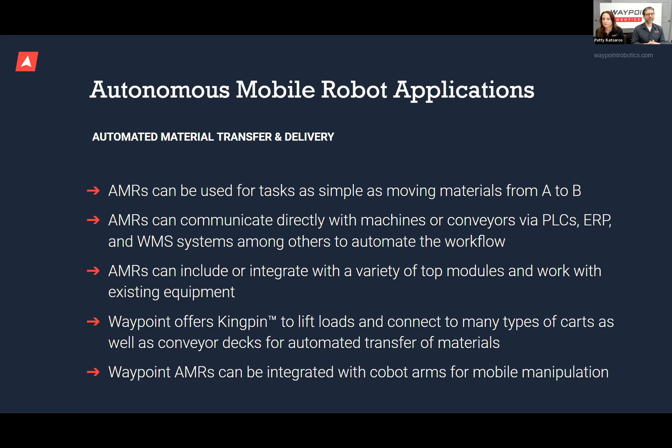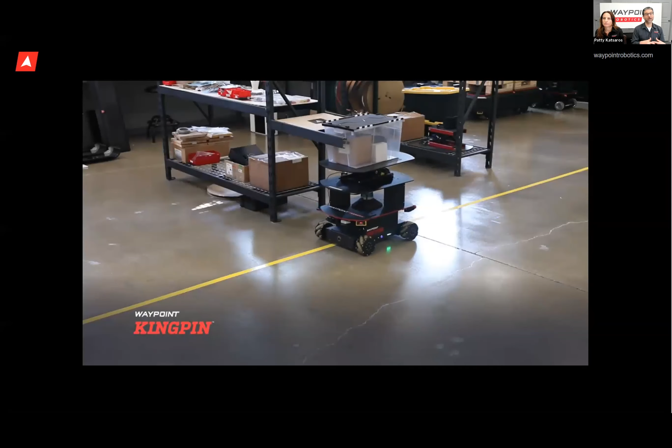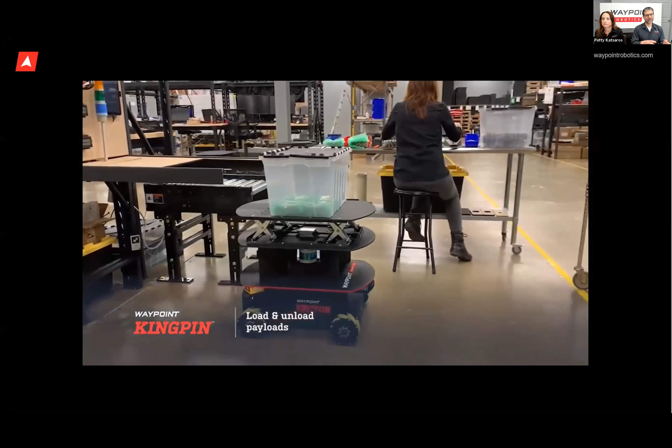This allows robots to automatically load and unload, which lets workers keep doing the things that only workers can do at each end, without having to synchronize their activities with the mobile robot. Having those activities decoupled at the beginning and end of the trip makes the people at each end more efficient and the robots more efficient, so they can each work in their own time. This is an example of the Kingpin top module.

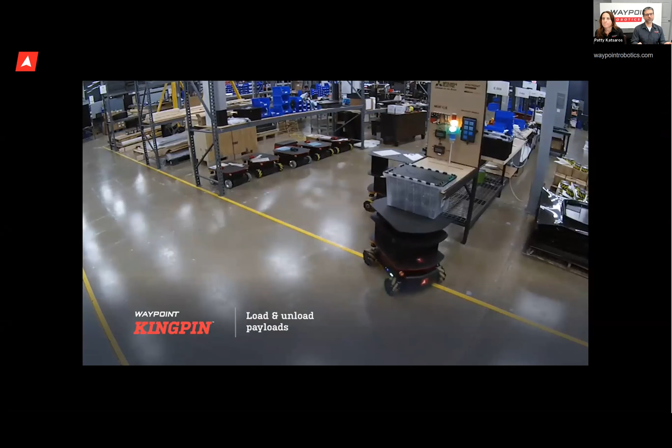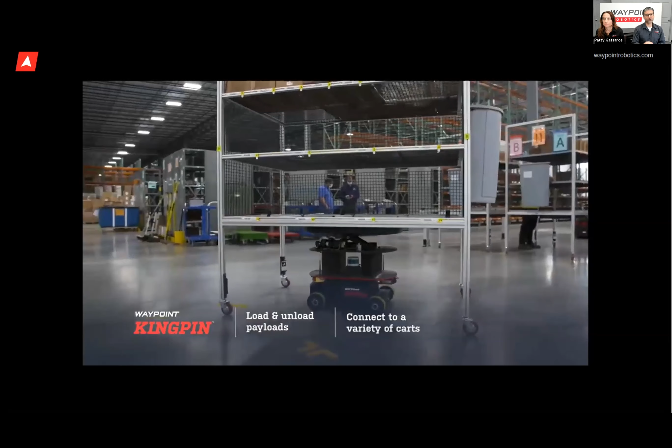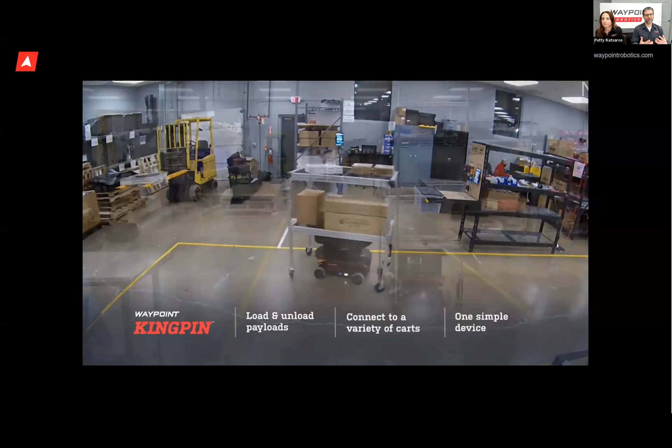It's a lift deck that can pick up and drop off totes. Another way to accomplish that decoupled activity is to use a cart, and Kingpin can also hitch to a cart and pull it around the facility. It can carry a tote one way and move a cart back going the other way. That decoupling of activities is one of the key benefits to having automatic loading and unloading.

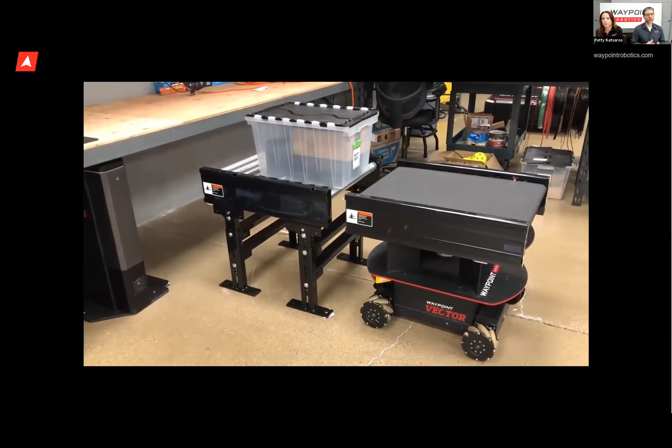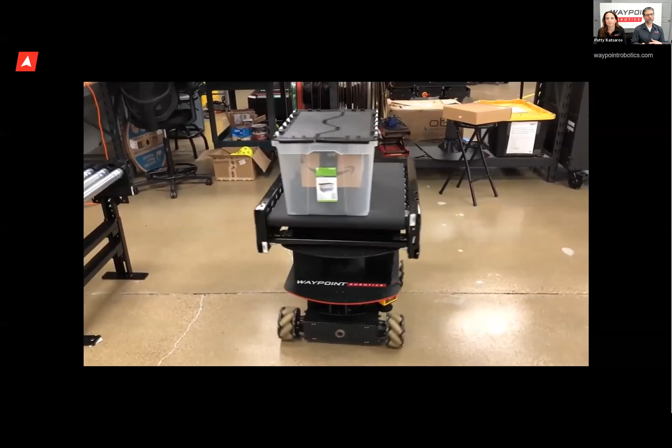There's other types of material. For example, a conveyor is a very common thing you'd find. The same value applies here: being able to quickly and accurately dock to a conveyor and then have it communicate with the fixed conveyor to exchange the tote, box, or whatever the material is. That decouples the activity of whatever is supplying the materials and whatever is receiving the materials, as well as all of the people working around it. So the objective is to take those dull, dirty, dangerous, boring tasks and let the robots do them.

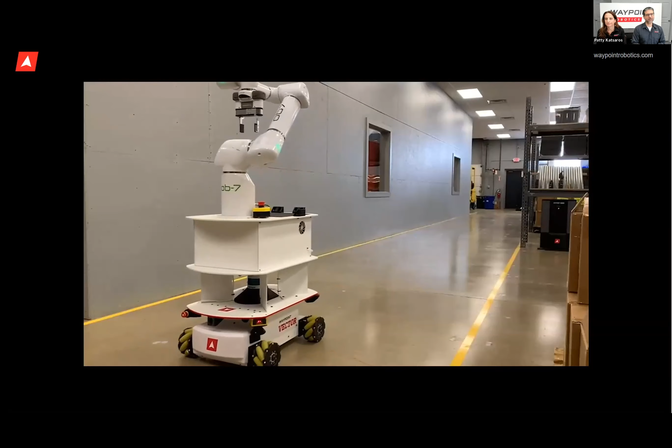The most sophisticated type of top module is a mobile manipulator. This is a collaborative robot arm combined with an autonomous mobile robot base. The best ones have a really complete integration of the two systems, and if they're really easy to set up, this is a robot that can move in spaces and move in ways that people are already moving.

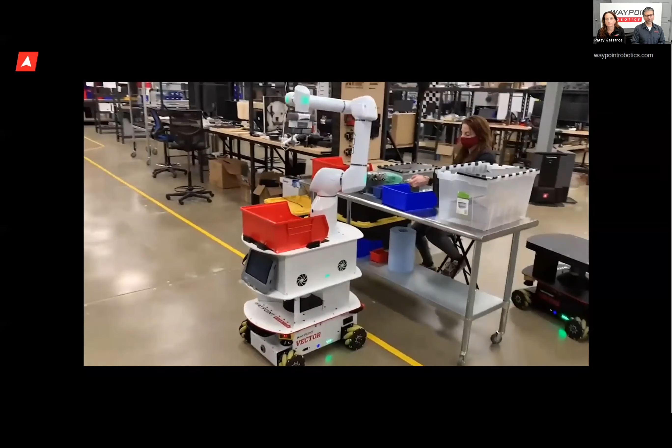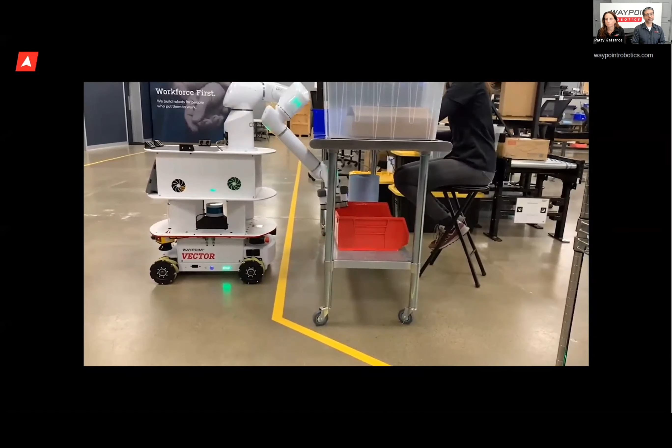So if you wanted to automate mail delivery in a huge facility, this is an example of a robot that doesn't need a pickup and drop off station or a conveyor or a cart. You can use all of the things you've already been using with a person and have the robot pick up a tote full of mail and drop it off at all of the appropriate stations without having to do anything additional to the environment.

Another application is heavy lift stuff and things that forklifts have traditionally been used for. We've had a lot of requests from customers over the years to try to reduce the safety risks associated with forklifts. It's kind of shocking how many injuries and deaths are related to forklifts, and it's not entirely surprising when the extremely long distances a forklift has to travel are the least interesting and most high-speed parts of the job.

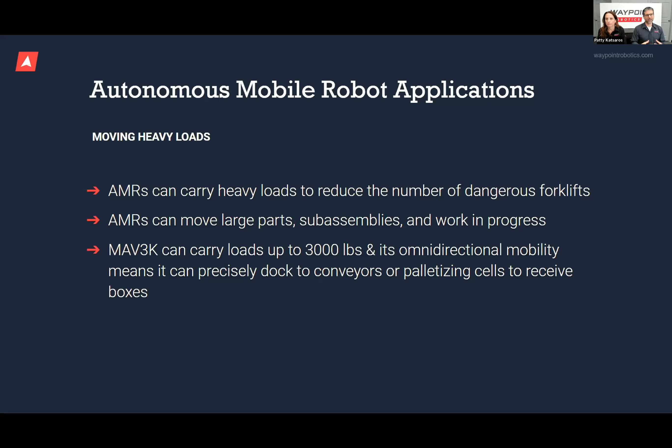If you can concentrate the activity of forklifts in a certain part of the facility and limit pedestrian traffic there, then again you're decoupling activities and separating people from the danger. You also have an autonomous mobile robot that doesn't blink, doesn't get bored, doesn't get distracted, and makes the long trip through the facility.

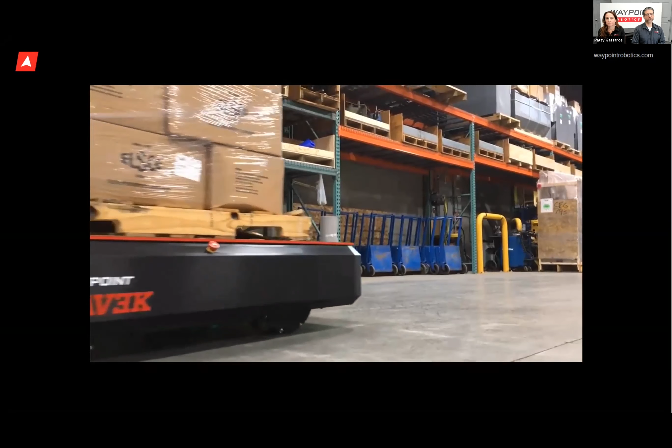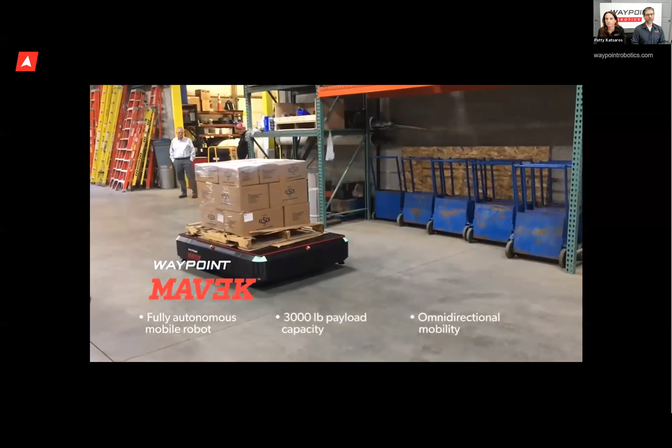Our customers are always talking about needing more people. Workforce challenges are really driving all of this, and forklift drivers are a great example of a skilled worker with valuable experience and expertise that are frankly hard to find and hard to retain when there's better offers. Being able to utilize the great team you already have for the things only they can do, and then let the MAV3K or any other heavy lift robot carry the big items through the facility, is a big win.

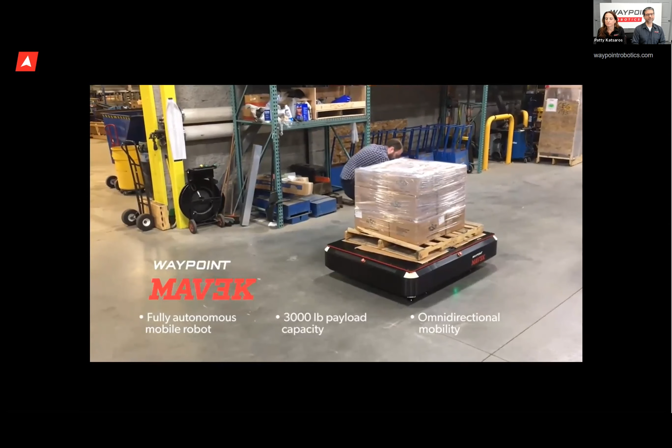And I'm going to steal Patty's joke: you also get a free pallet wrapper with every MAV3K you buy. So that's a good deal.

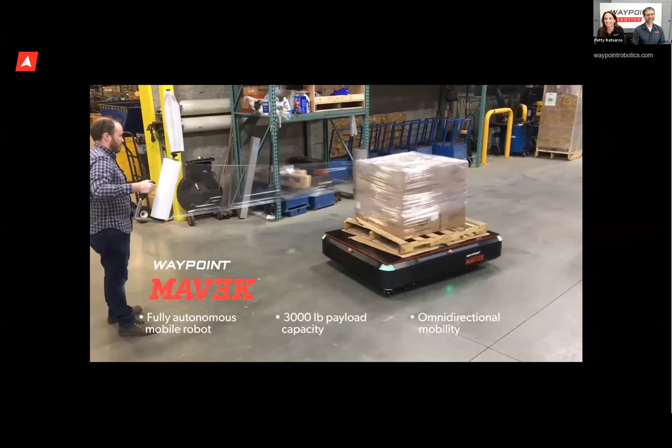This following video is a case study that we did with an e-commerce company. This company was already experiencing a lot of growth and needed to expand. They ship medical supplies to older folks in their homes, and when the pandemic hit, talk about an essential business. Their business was just booming, and we were already in the process of deploying an AMR fleet in their facility, which just really highlighted how necessary it was.

When they added the AMRs and the voice picking system to their facility, compared with their previous method of just using manual push carts, they were able to triple their picking efficiency and double the overall output of their facility with a 99.9% accuracy rate.

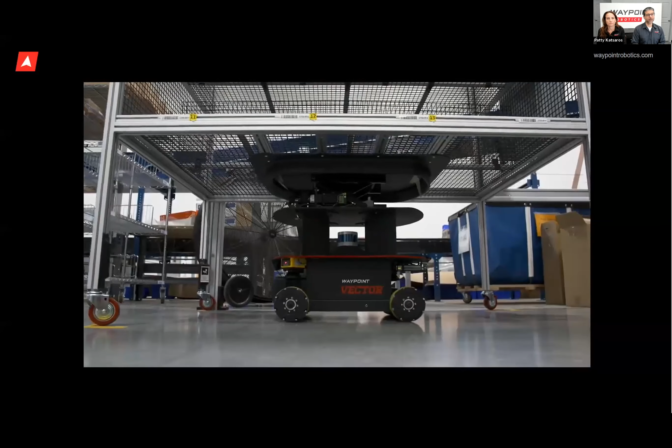They went from being barely able to keep up to actually getting themselves in a position where they're meeting all their promises to customers and meeting all of the demand, and also positioned so they can grow the company in a way they want to grow. This is an extremely scalable solution. The way it works is the voice picking system sends the robots and the people to the same destination independently.

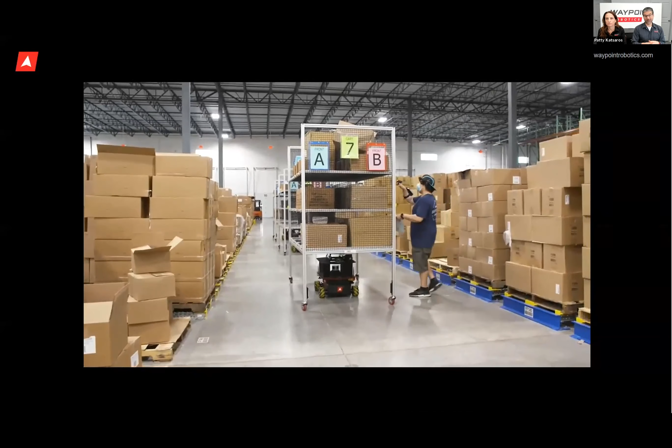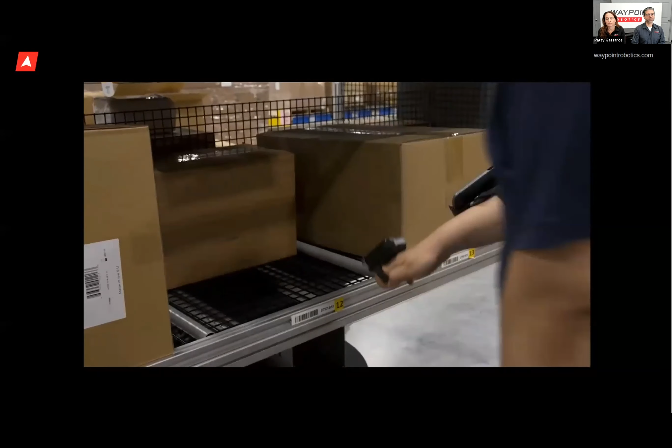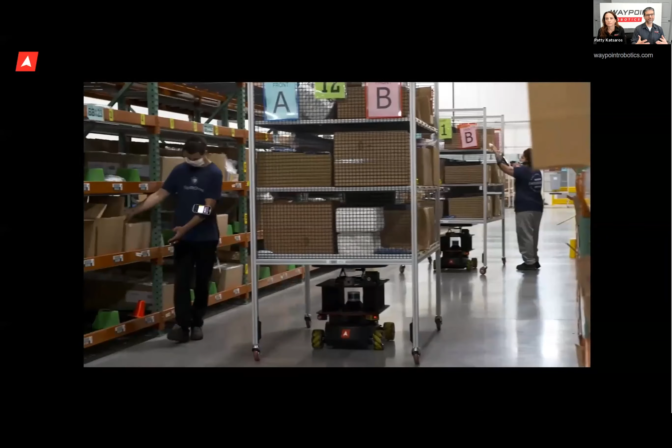And when they meet at that location, the picker gets an instruction to pick a certain box and place it in a certain location. And then when they scan that code, the robot goes on to its next destination, and the picking system sends the person to their next destination. This decoupling of material movement from the things humans are uniquely great at doing is one of the things that makes this such a powerful technology.

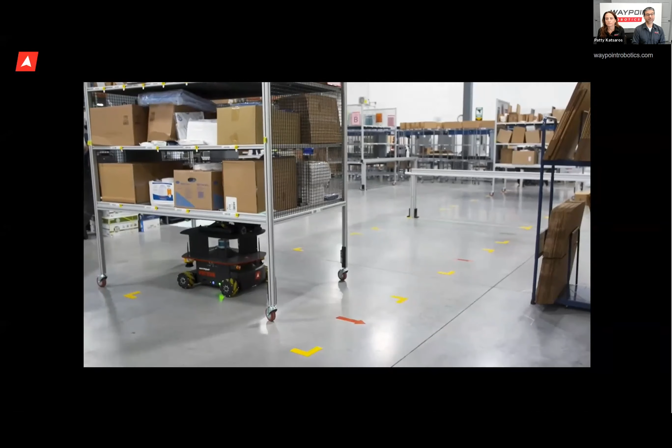Okay, so we talked a lot about the potential benefits that AMRs can offer workers, but a lot of companies are still reluctant to adopt, and workers are a bit hesitant. And we want to dive into this a little bit more.

So we hear all the time that workers push back when change is forced upon them, and like everybody, they often fear the unknown. When you have tools that are complicated and not really made for them or with them in mind, they might hesitate and be fearful of the tools.

We'll hear that they often resent these outside experts who come in and pretend they know the technology of the robot or the automation piece, but they don't know the company, the task, the job, the trade like those valuable workers do. Those workers who have such great expertise are going to resent those outside experts.

And then they're going to naturally worry about job security. If a complicated tool comes in, they might immediately think we could get displaced, especially lower skilled workers. Data even shows that can happen. So if it's a complicated tool that's difficult to work with, they understandably are going to resist and be fearful of change. So what can be done?

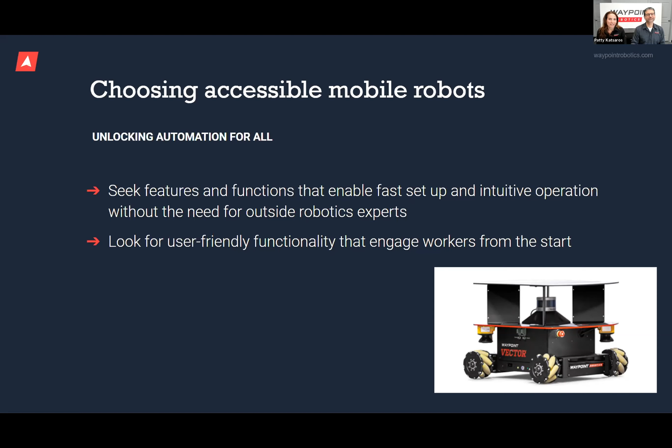We talked about the importance of choosing tools that are accessible, and now we'll talk about some features to look for specifically with AMRs. We want features that enable fast setup and intuitive operation without the need for robotics experts, and user-friendly functionality that engages workers from the start. Jason's going to walk us through this.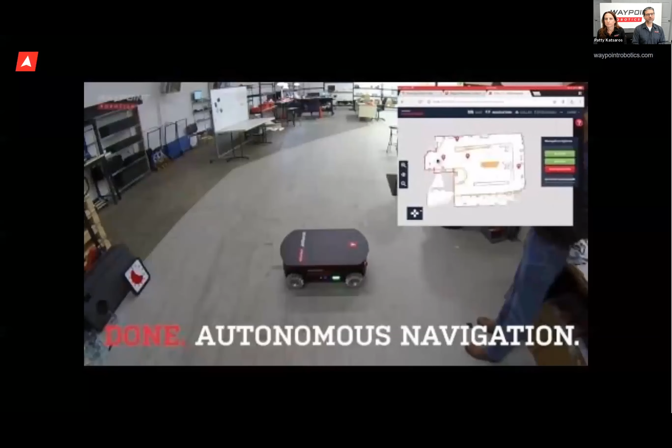So what to look for in an AMR that delivers on the needs Patty just described: they need to be easy to set up. We mean easy for the shipping and receiving clerks, the assembly line workers, the warehouse workers. It needs to be easy for them to configure and reconfigure without having to go to community college. It needs to make sense to them. What we've done to address that is build our Dispatcher software as the main interface when setting up the robot.

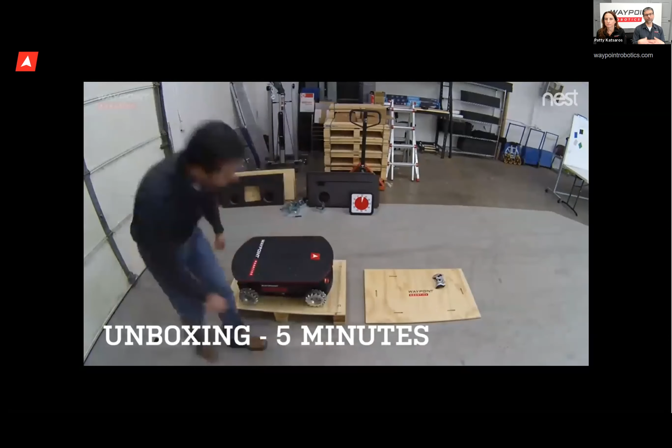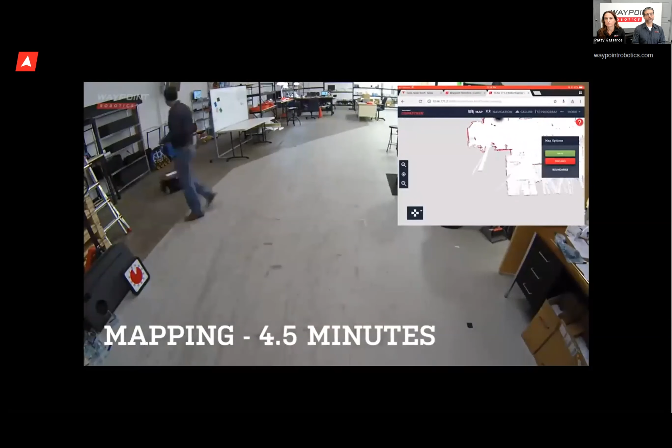We looked at the entire user experience of setting up an autonomous mobile robot, thinking through every part we could improve for the users to make it easy to set up. With dispatcher, there's always a big green button that's probably the thing you want to do next. If you pick the big green 'make map' button, you use a game controller, which people are familiar with, to drive the robot around like a remote control car, and it makes a map for you.

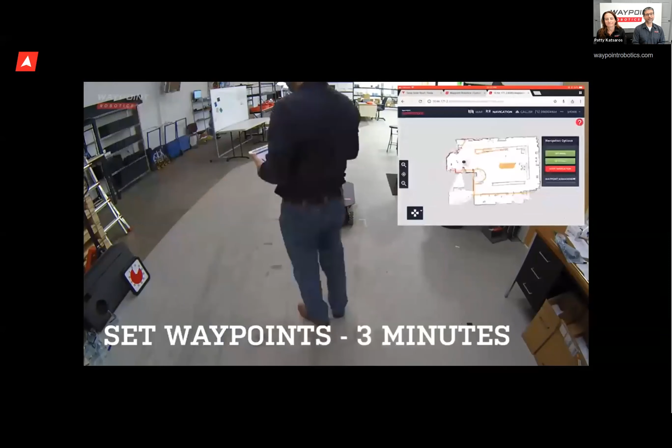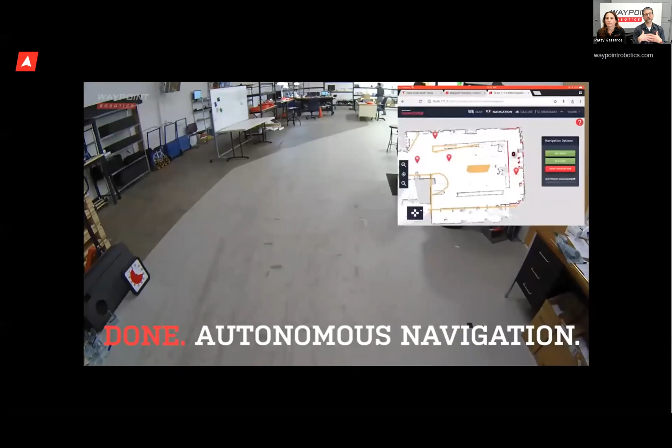Then you can use dispatcher to set up keep-out zones, which are areas where you don't want the robot to go. The red dots are waypoints, where you want the robot to stop. You can make a playlist of waypoints and the robot will start navigating right away—you don't have to get IT involved. When we do demos at customer facilities, we always had the frontline workers involved with us. That's the setup process.

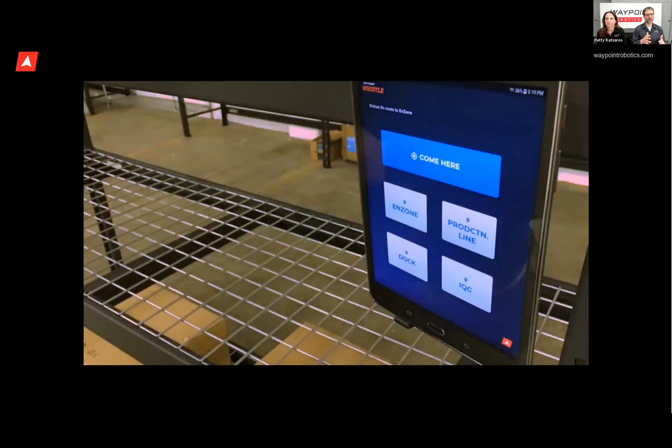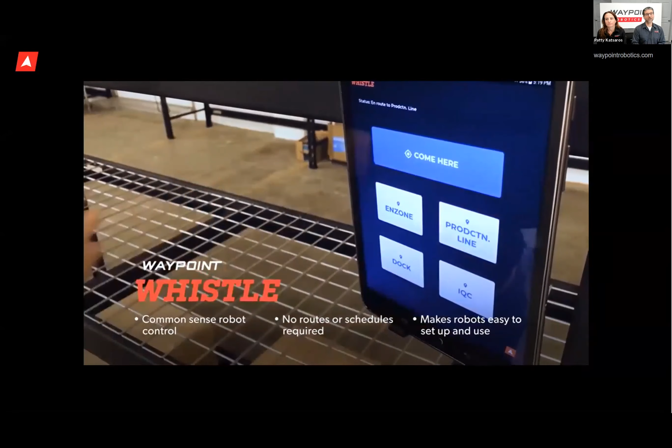On day-to-day operation, it also should be easy and intuitive. We've made Whistle a product with a familiar interface—it works like an elevator, and the setup of Whistle happens in the background while you're doing the previous step you just saw. You push the 'come here' button, and just like an elevator, a robot shows up. Then you put a package on it, push another button, and the robot goes there.

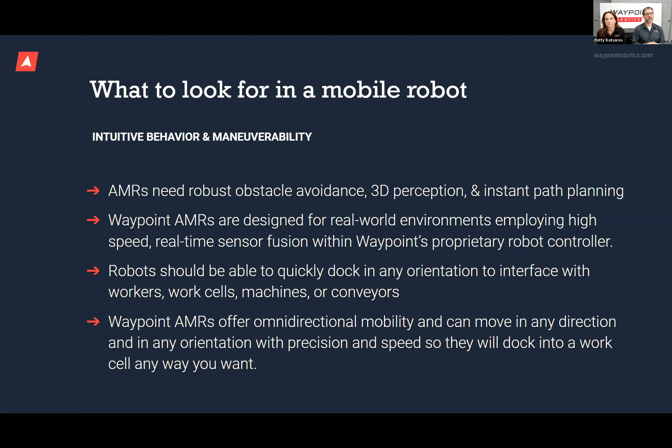A lot of the technology we've baked into our robots has intuitive usage and behavior at the heart of it—that's the most valuable part. When setting up a mobile robot, you either need a robot that perceives the world in a way that makes sense to someone, or you have to educate someone a lot about how the robot sees the world. So we've given our robots 3D perception so the robot can see the world in a similar way, meaning the robot will do what users expect.

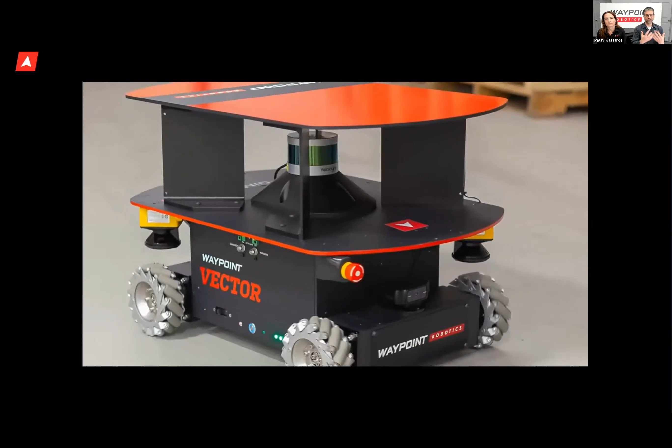It doesn't make sense to people that a sophisticated mobile robot couldn't see a pallet jack. But a lot of robots can't see a pallet jack, or small objects on the floor.

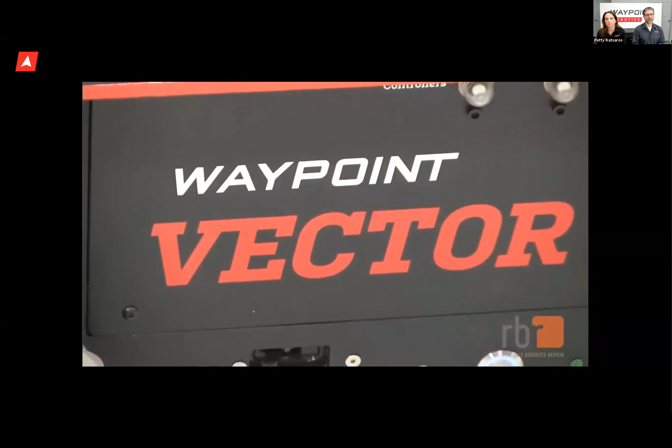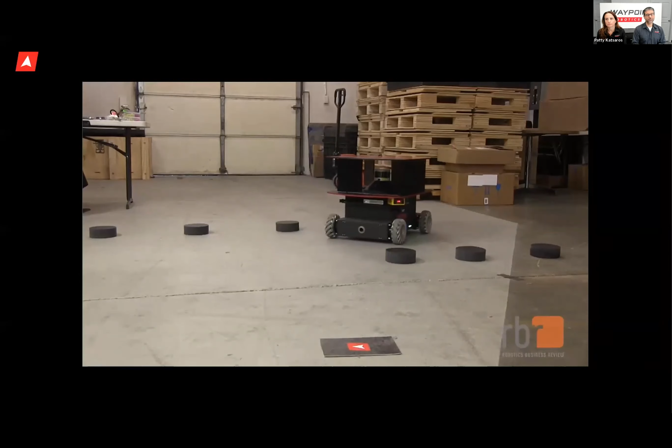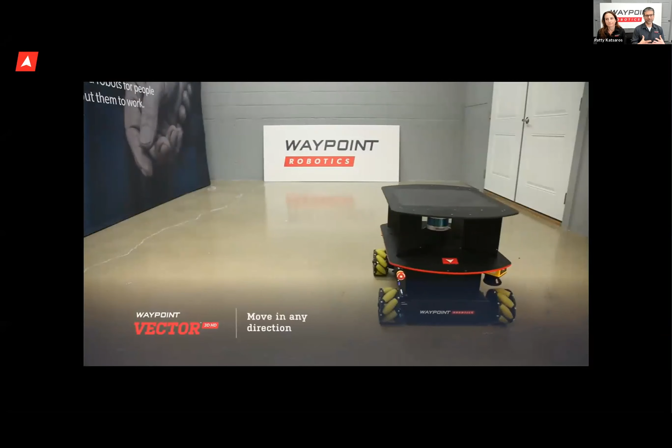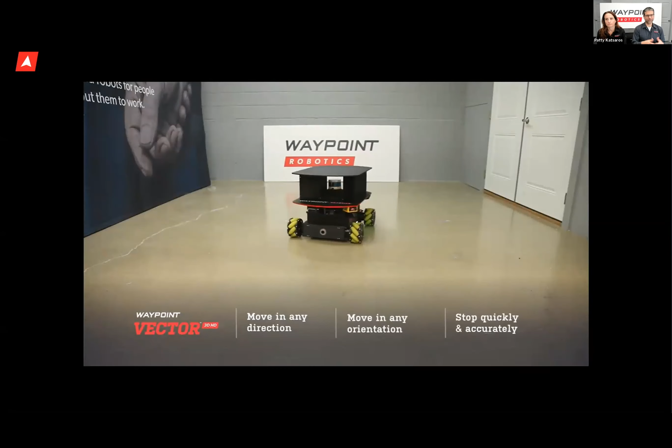Because of that, you either have to give them a lot of training to know where to put keep-out zones and what kinds of things it can't see, or you need a robot that can do that on its own. Another key thing is maneuverability. It needs to not only see the world the way we see it, but also move in the spaces and places and ways that people move, so that when a person wants the robot to do an activity, it can do it in a way and place that they're used to seeing it done.

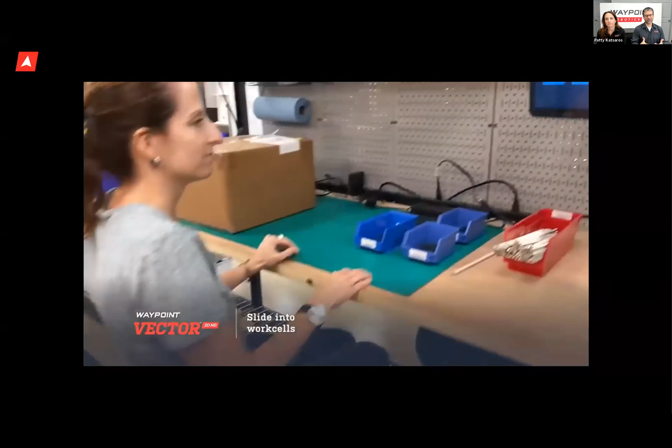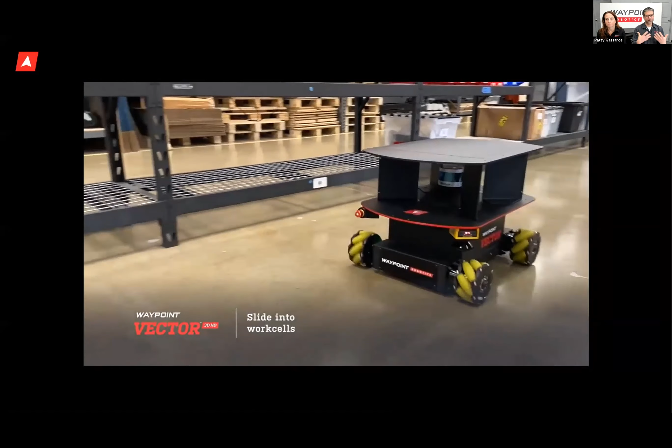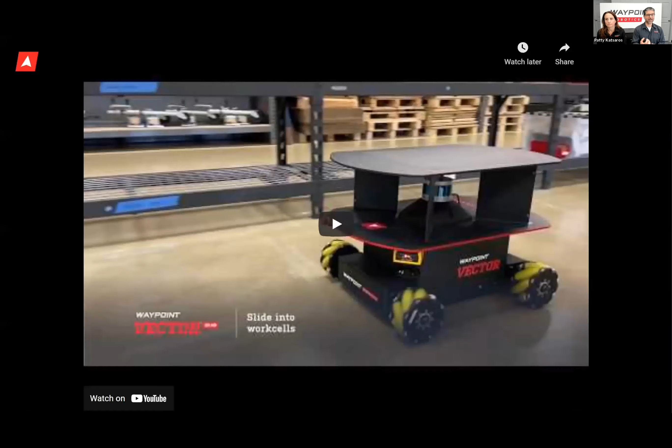If you have to explain the kinematics of a particular drivetrain, you've already lost them. This needs to be a tool that they can drop into their existing facility. It can go into a work cell or piece of machinery in any direction or orientation, and do all of that automatically without any complex setup. While these things are really cool from a robotics standpoint, the real value is how intuitive it makes it for the users.

Batteries and charging are another thing we're all kind of used to the burden of, plugging in our cell phones every night and cordless drills and things like that. Battery maintenance in our lives is almost a constant subtask. But when you're talking about an AMR, it's not just about convenience, it's about readiness, and about the longevity of the product and the expense of maintaining it. So we really wanted to try to take batteries and charging off the plates of our users.

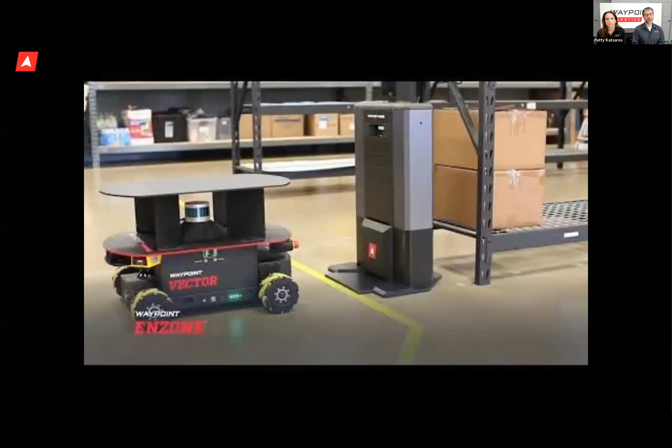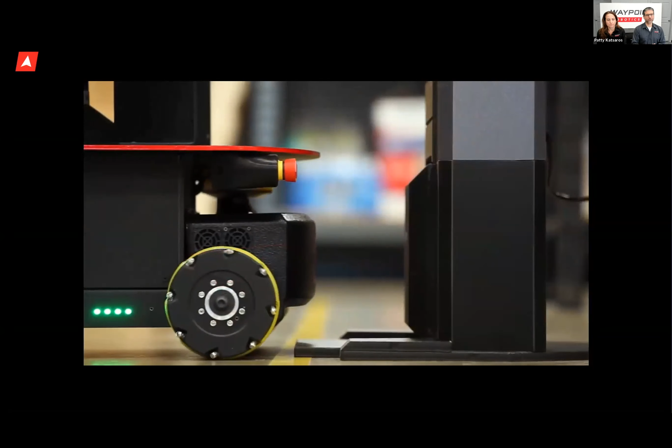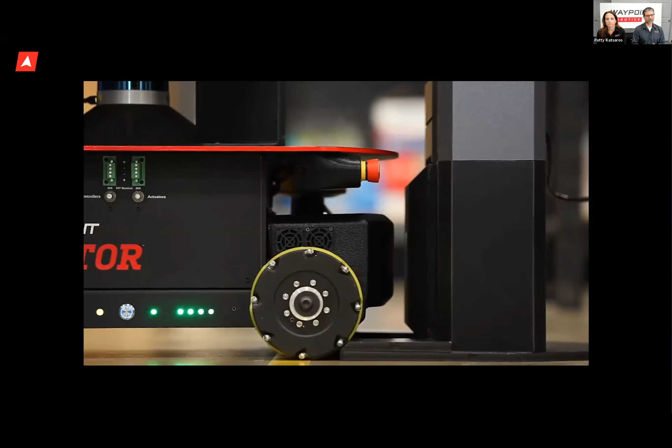We came up with the EnZone wireless charging system so that it doesn't have to be perfectly aligned. You don't have to clean the contacts, perform maintenance on them, or replace the contacts. The robot will dock itself when it's ready for a charge, and it just has to get close to the transmitter. If somebody walks by and bumps it, and it becomes a little misaligned, it's going to continue to transfer power, and it'll be ready to use when you get there in the morning. The batteries will stay healthy, and the organization can count on that piece of equipment without having to train your workers about batteries and charging.

Network independence is something that doesn't come up as often as it should. No offense to any IT folks in the room, but anytime anybody has to involve IT, it can add a couple of weeks to your project. So we've built our robots to be network independent. That means all of the systems, all the sensors, all the intelligence, all the data they need is on the robot, so it doesn't need internet access or even local area network access to do its job. That means a worker can get this thing, take it out of the box, set it up, and start doing real work without having to involve the IT department as soon as they get it.

That's a critical differentiator. You want to be able to get started quickly, but also make sure it's scalable. Interoperability and communication with external devices and software systems is equally critical, but it shouldn't be dependent on them. Nobody wants to trust their livelihood to Comcast, and nobody wants to be handcuffed by a system that can't communicate with lots of different devices. We think these things are extremely important, and we hear a lot of feedback from customers of all sizes that network independence is critical, whether it's because they've got a huge facility without Wi-Fi everywhere, or because their corporate policies make it really onerous to get anything new on the network. People need to think about it.

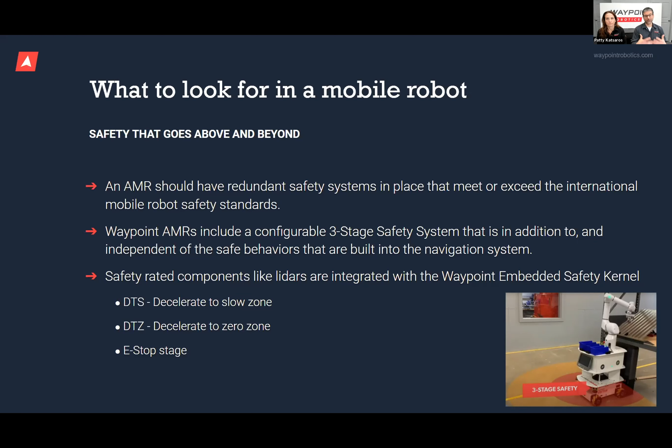And then the third stage is the e-stop phase, where if necessary, power can be cut to all of the propulsion devices. This is separate and independent from the navigation system. We've architected this system, which is in all of our robots, ahead of the international standards that were just released. We built our robots to be compliant with those standards in anticipation of their release.

There's a lot of ways to measure ROI, and I'm going to talk about the ones that are harder to quantify but really easy to understand. When you're a worker who has unique skills and talents, and you feel really good doing those, you're in the moment, in a flow state—say you're rebuilding a transmission—that takes a lot of expertise and brain power.

But then say you have to stop that and grab a 300-pound transmission and push it across the facility. That's not fun. We've heard that directly from people who rebuild transmissions, and they would love to not have to do that. It's not work they're proud of, and it's physically exhausting, and it wears out their bodies.

So think about one transmission remanufacturer who has to do that, and another where the workers are only engaged in the work they're most proud of, without that laborious, interrupting task—that's going to be better. If they can go home at the end of the day with more energy for their friends and families, that's better. And if they have longer, more productive careers and their bodies don't wear out, all things being equal between those two companies, you're going to go with the one where you've got all of those benefits.

Those things are easy to understand, but people aren't used to trying to calculate them. Likewise, companies and leaders who give workers those easy-to-use tools, whether it's a mobile robot or any other type of automation equipment, need to look for tools designed for workers. Companies that get those exciting tools will have an easier time attracting people and also retaining them by keeping them happier day to day.

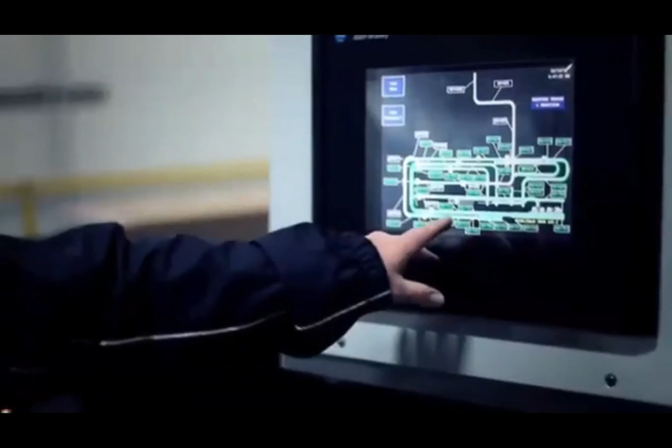A number of distribution and warehouses no longer just have forklifts and clipboards. They use robots and lasers and radio frequency identification tags and a lot of complicated systems, and we're looking for individuals like you to help run these machines. Do you ever wonder who maintains this incredible technology? Today we are going to hear from some of the top supply chain technicians in the field. You'll need to understand how computer technology controls the mechanical functions of the automated system.

Yes, I used to work in production. I did it for 10 years. I picked boxes, threw cases on the line. I decided to go back to school, got technical training for 2 years. Maintenance had an opening, I applied for it, and I've been here ever since.

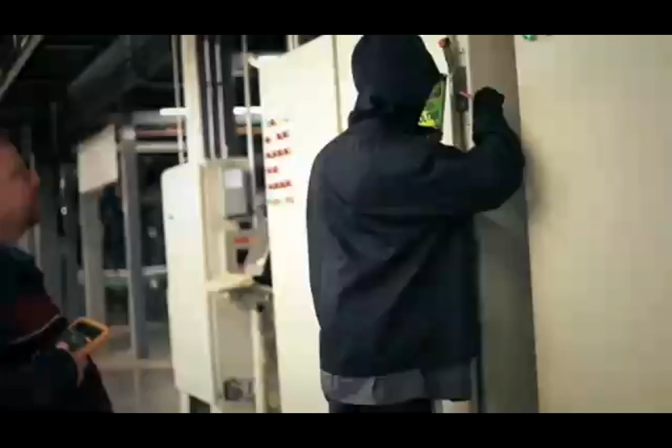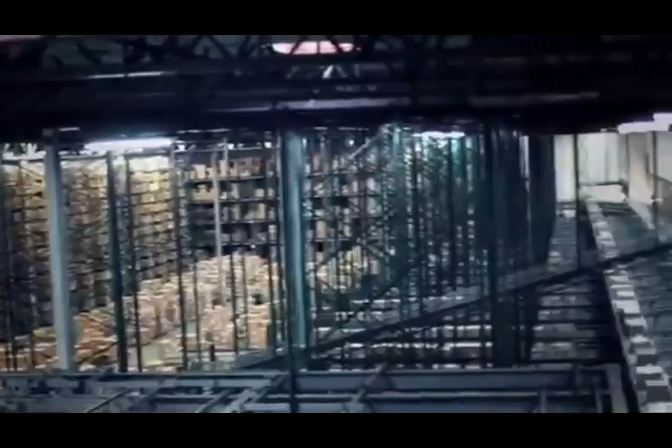If you're a person that likes to fix broken things, then supporting the supply chain companies is the thing for you. I worked in production for 8 years, and I got a chance to go to school, and now I've got a better job with better pay. In the next 20 to 30 years, there's going to be massive growth for technicians who can work on automation that is far beyond their imagination today.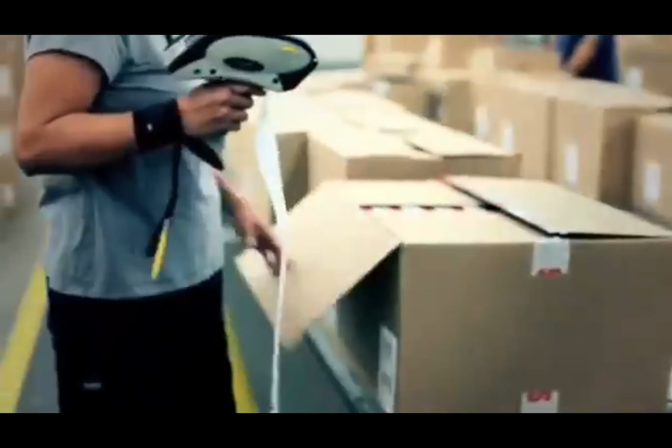Yeah, in my 40 years in the maintenance field, I've only been out of work 2 weeks. My favorite part of the job is to come in and solve the problem. Electrical is very important in maintenance because without it, you cannot troubleshoot or repair it. We've got certain responsibilities in the building, in our plants, and we work in these responsibilities. But there are other people working in pneumatics, mechanics, electrical, electronics, AC, you name it.

As training and development manager for a large supply chain company, I can tell you there are many high-paying jobs available for you. Every day I come to work, I do something different. I do electrical, I do airlines, batteries, forklifts, etc. It's never one thing. If you've ever taken anything apart or have been interested in building robots and computers, then we're looking for you. There's high-wage, high-skilled jobs in automated systems.